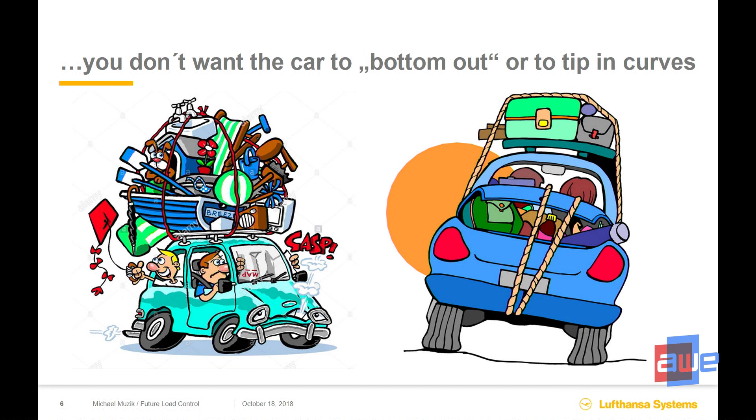Imagine you pack your family car for a family vacation with two children. You will look at where you sit the passengers and family members and where you put the luggage, because two things might happen: if you put too much weight into the car, it might bottom out when you hit bumps on the road and get damaged. Second, if you put too much weight on top, the car might tip when going around curves.

So by carefully considering where to put the passengers and the luggage in your family car for safety reasons, the same care has to be taken when loading the aircraft. Only different gravitational rules apply - the so-called aerodynamics - because the aircraft is not only taxiing, it's also taking off, it has a flight phase, and it's landing. So this has to be considered.

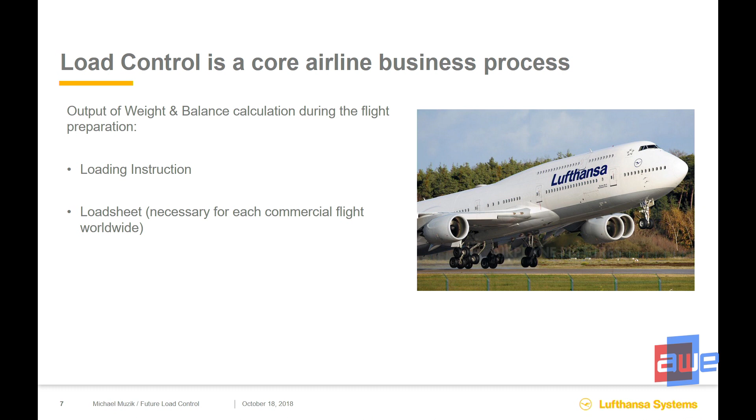Coming now to the weight and balance of the airline business - the weight and balance process is one core airline business process in the operational process, alongside crew management, operations control, fuel calculation. There are two outputs. First is the loading instruction, sent to the loaders and the ramp agent on the apron. This loading instruction is either digital or on paper, telling the people how to load the aircraft - exactly this ULD, this unit, this container has to be put there, and this container has to be put there.

The second thing, which represents the final step of the weight and balance process, is the load sheet. The load sheet is sent automatically, usually to the cockpit, to the pilot, and there you can see the maximum weights for takeoff, landing, and taxiing. He gets the passenger data, information about dangerous goods, and the trim data - the balance data.

So basically, when we're talking about weight and balance in the airline business, the weight part means the load controller has to ensure that the maximum permitted takeoff weight is maintained, and therefore some calculations have to be done by a system.

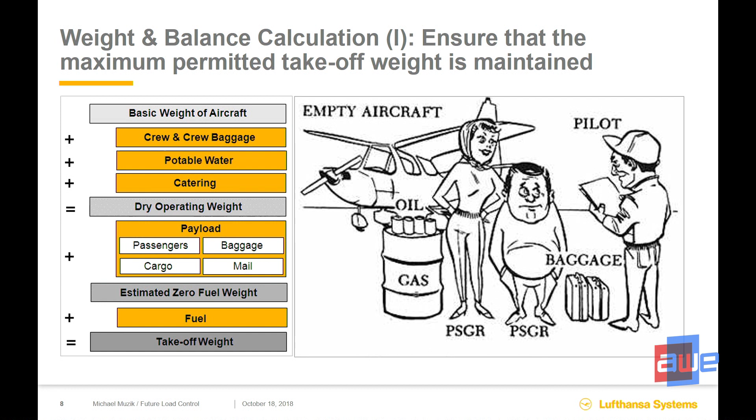You have the basic aircraft weight. You have to add the weight of the crew and the baggage, the potable water, the catering. Then you have the dry operating weight, and then the payload - and there it gets interesting because you also have to load the cargo, the passengers, the baggage, the mail, special load, whatever. This is the estimated zero fuel weight, and this is done in the pre-phase before the fuel is calculated. This is very important because the estimated zero fuel weight is sent to flight dispatch, who calculates the operational flight plan - saying how the aircraft will fly, for instance from Frankfurt to JFK, which route, and how much fuel has to be taken.

The more accurate you are, the better the fuel calculation. This is really money for the airlines, because if you have a wrong calculation, you might carry a lot of excess fuel, and that also costs money.

The balance part - the load controller has to ensure that the center of gravity is within the permissible range, which means you have to distribute the load, like the baggage and the cargo, in a way that the aircraft is also safe when being in the air.

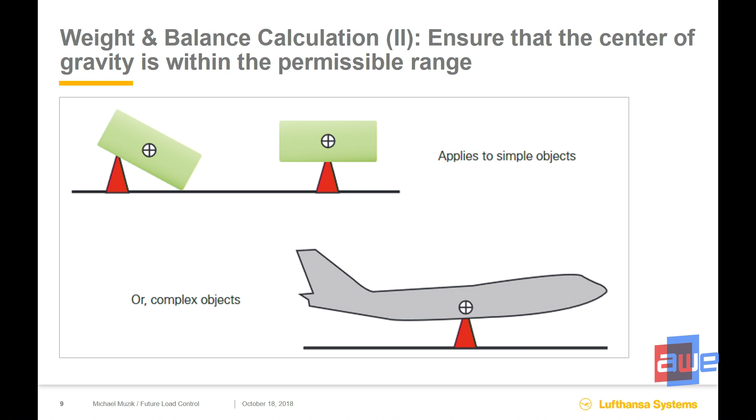Okay, I hope this was a little intro into weight and balance. So let's go into the day-to-day business of load control.

How does today's load controller's world look like? At big airlines like Lufthansa, they have big load control center departments where one load controller sits in Cape Town, or in Istanbul, or in Brno in the Czech Republic, and they centrally do all load sheets and loading instructions for all the Lufthansa flights around the world.

So basically, this is like Anna. She's now sitting in Istanbul, and she's doing load control for Lufthansa at the moment with an application.

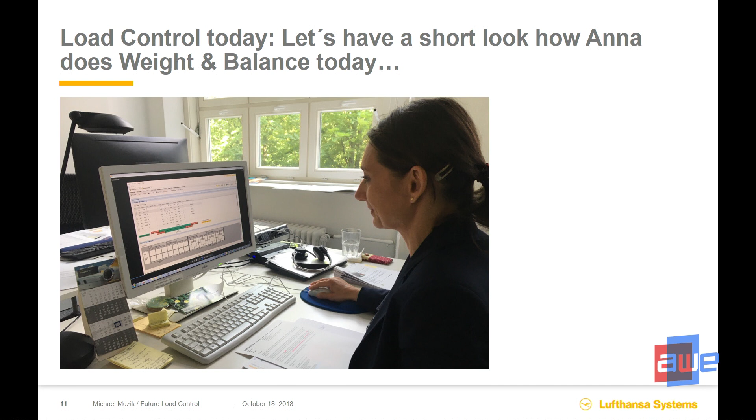And this is how the application currently looks like, just to give you an idea about the 2D visualization. On the bottom, this is the most important part. We are doing the loading of a 777.

This is a freighter. There you can see the compartment, the belly. We have a main deck and a lower deck. And above this, you see the compartments, and above this, the green thing.

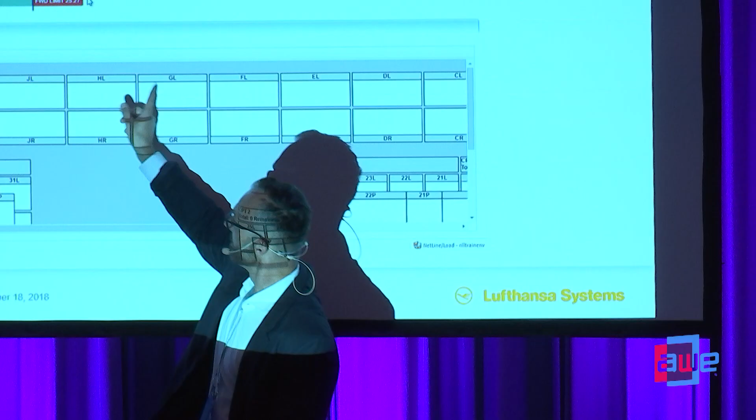This is the trim bar, where she always sees when she puts some kind of container into the belly here. This is representing pallets and containers. When she puts something loaded versus nothing loaded, she can always see if she puts freight somewhere, how the trim is going to change.

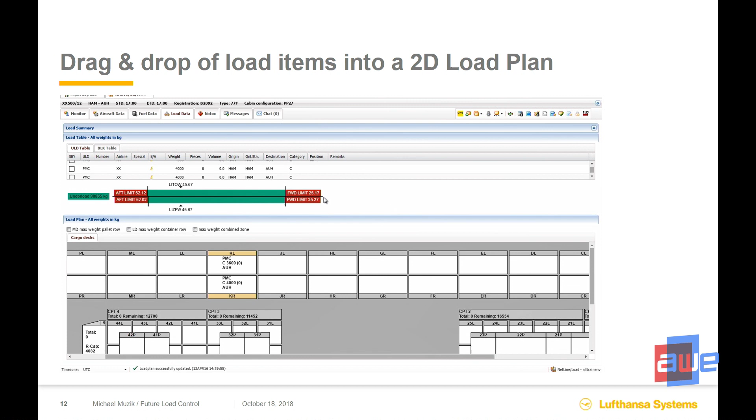And if it's green, she's still within the permissible range. So this is basically how today's load controllers work, the 2D visualization of the load plan.

What you cannot see, and what is a problem especially among cargo airlines, is that you can't see indents or overhangs. It's always just represented as a pallet or container surrounding. So this usually causes a problem when doing load control today.

So we were very often asked, what's your vision about load control? Where do you see it? We were sitting and considering how load control of the future could look like.

And of course, we were looking among other branches like plastic surgery and architecture, or environmental design, or the automotive industry, where VR is already a main mover and very imminent. So that's where we got our idea.

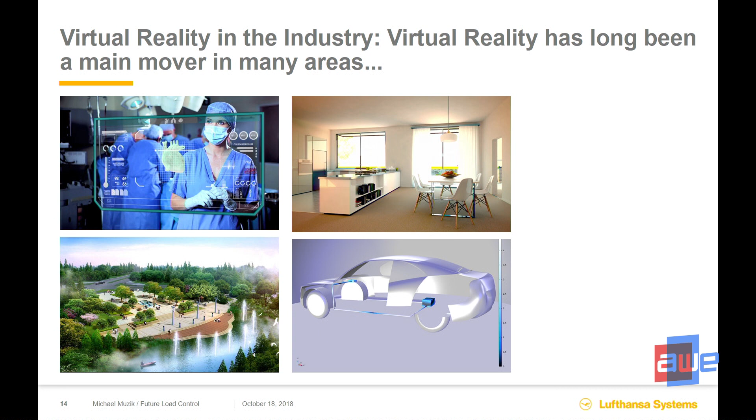And then we also looked at how VR is currently being used in the airline industry, basically or technically speaking in the design phase, like designing aircrafts or designing aircraft liveries or designing cabin interiors. The airlines moved very fast forward with the virtual design technology.

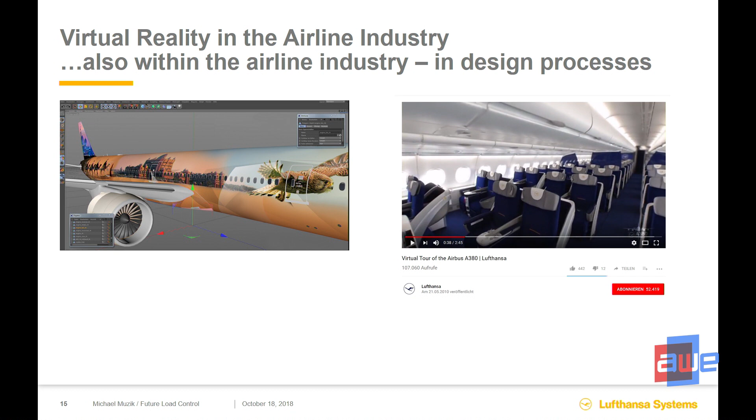But when it comes to operations, there we still have a bit of a gap. Most likely you will know that pilots generally simulate flight situations in the flight simulator.

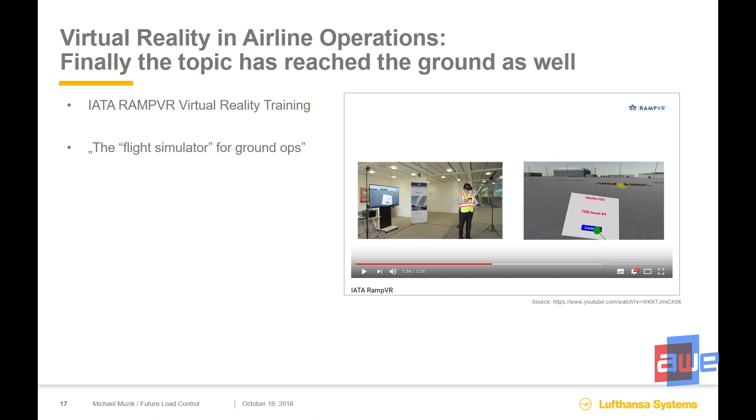And so this topic is now also coming to the ground. For instance, IATA has developed an application that basically also provides certain situations for the ramp agent who is, for instance, responsible to taxi the aircraft to the gate position. So it's basically now coming into the airline business, but very, very slowly.

The airline business is very reluctant to this stuff. So in airline operations, this is the only thing that I know of. And we just thought, okay, why not also use it now in load control?

And so how does future load control look like? And therefore, of course, we had to do some things. We had to virtualize the aircraft. We got the data from Lufthansa.

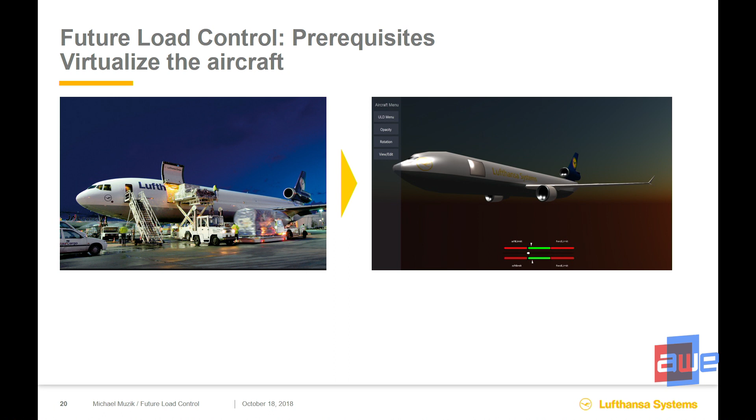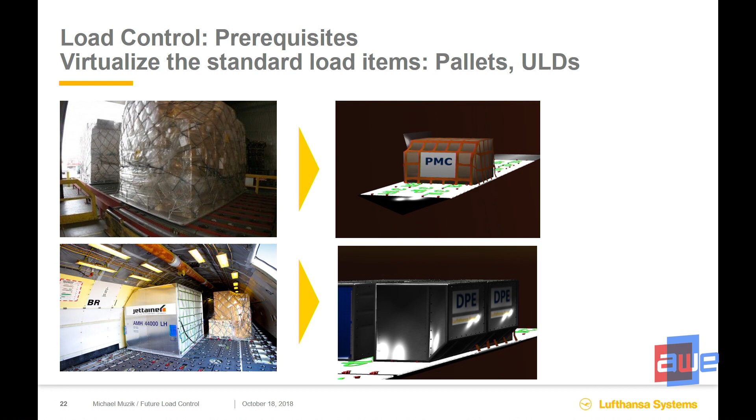For instance, for this MD-11, it's a cargo freighter, we created a prototype. We had to virtualize the interior, the holds, and also therefore we needed the aircraft data. And we had to virtualize the standard load items like pallets or ULDs, unit load devices, or also containers. The ULDs are the containers where your baggage will be loaded.

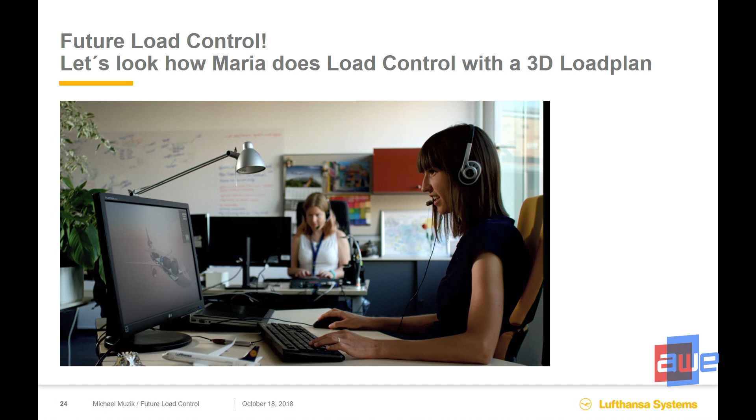And this is now how the result looks like. So let's get back, we switch to Maria because she is now already working with the 3D load plan. And I would like to show you how this might look like. So, and therefore I would kindly...

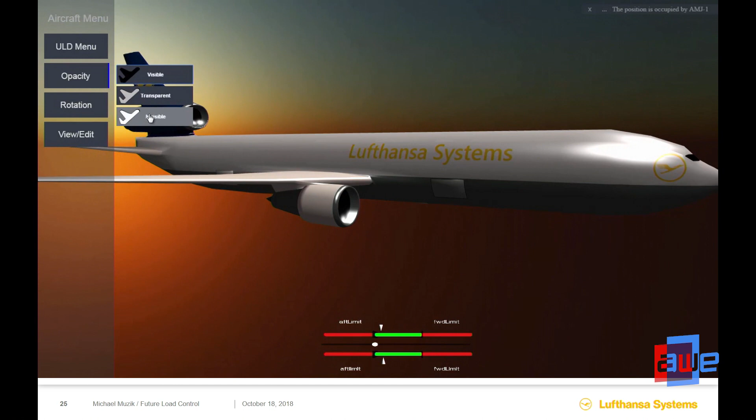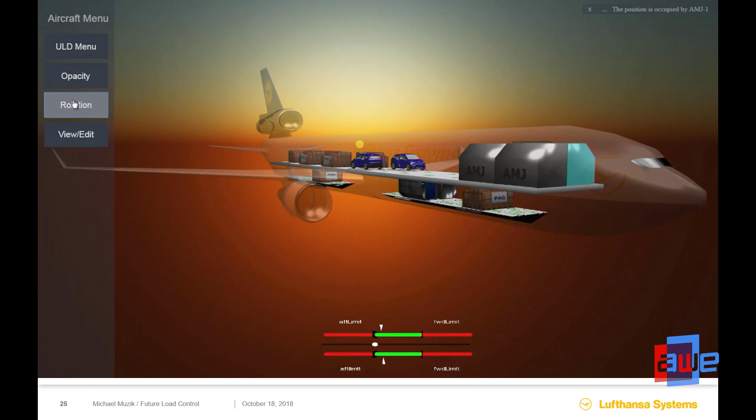So why not use it in load control, where loading instructions are still in 2D? The 3D load plan represents the 2D version in a highly user-friendly screen with intuitive navigation. It provides load controllers with a realistic view of what the load plan will look like upon completion.

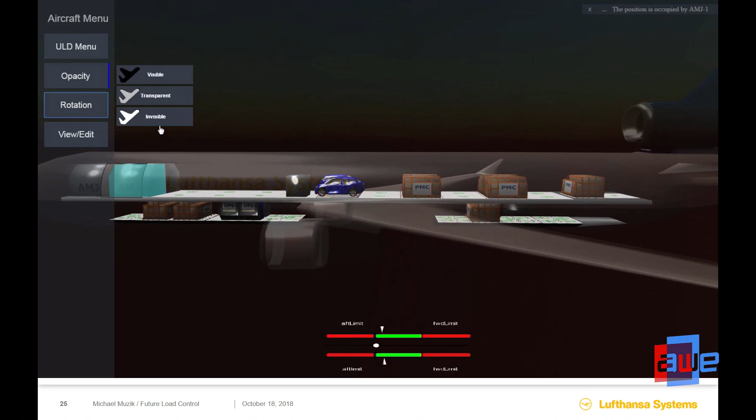The user can easily view the 3D load plan from every angle by simply turning or rotating it the way he likes. The load controller can also zoom into particular load items, especially if he needs a closer look at interior spaces, for instance to identify overhangs, indents, or inoperative locks.

When creating or optimizing the load plan, the load controller can easily add load items, and of course can also remove them with one click. Load items can also be distributed by simply drag and drop.

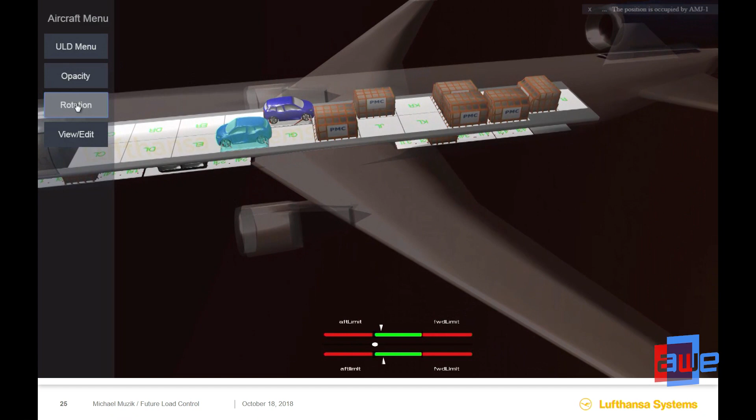The load controller immediately sees the result on the actual trim bar. All load data is updated automatically within the application. This includes all relevant checks for aircraft limitations and dangerous goods restrictions, as well as warnings if these are violated.

Okay, so this was now like a little impression how the 3D load plan looks like. I think you saw the difference between the 2D visualization.

However, looking at the two other operational products like the ramp solution or the simulator, the load controller faces one situation that is new for airline operations that the other two don't face. It's basically something that comes especially if cargo airlines are affected, that the user has to create part of his virtual reality, meaning that we have special load that needs special treatment also.

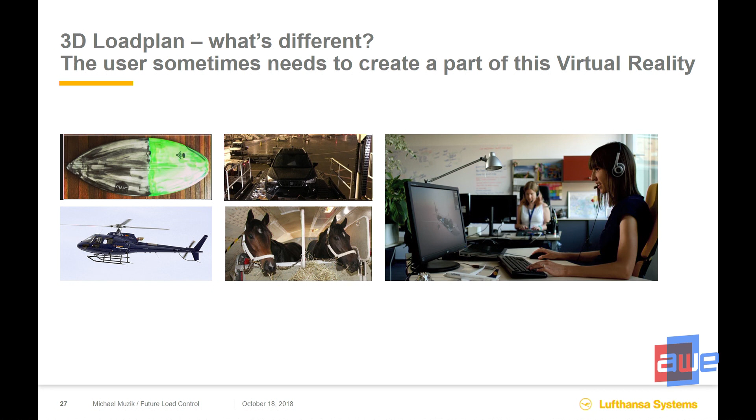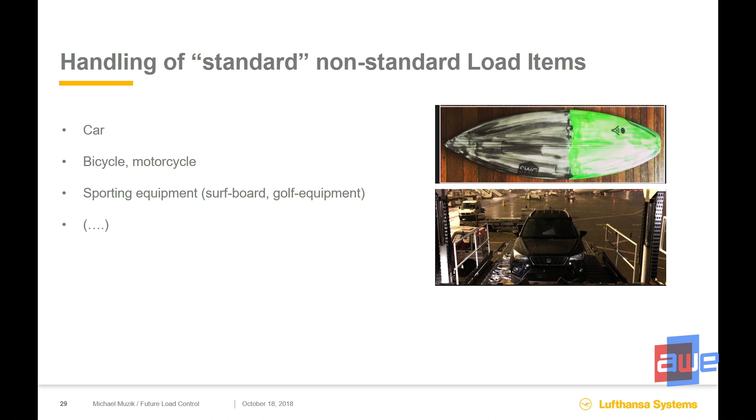So in that case, you can see that we have special items, and we divided them into two groups. The first one are standard, non-standard load items. What am I talking about? It's like cars, bicycles, motorcycles, sporting equipment. We were actually approached by the cargo airlines, and they asked us, okay, so what do we do with the special loads? What are we doing with the stuff that is not a bag or not mail?

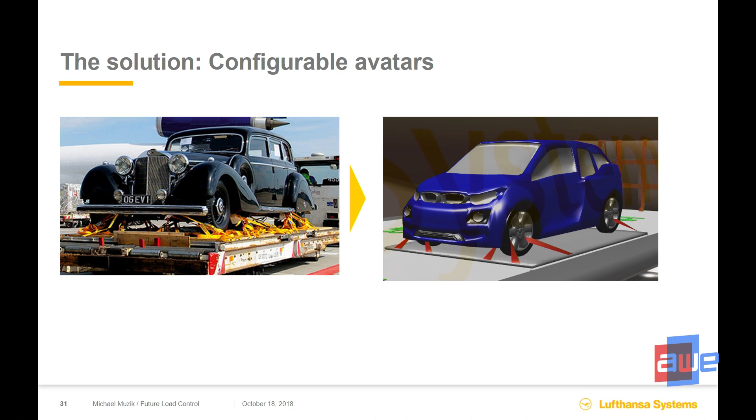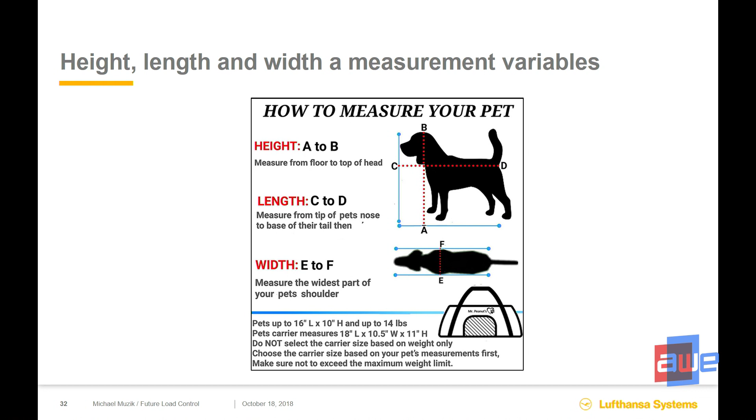So we basically had to think of a solution. And the first solution was that we were watching a movie, and then we said, okay, let's take this idea and create little avatars. So we created, for these non-standard items like motorcycles, cars or surfboards, little avatars, which can be configured by the user, just by inserting the height, the length, and the width, so that he can configure his own load item.

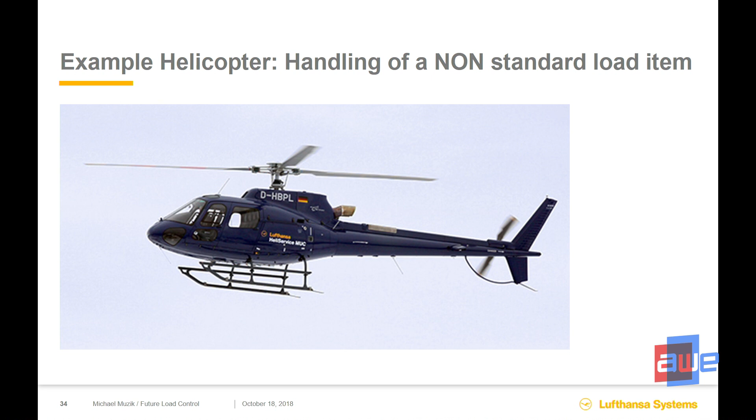The more challenging question was what to do with non-standard load items that are really completely non-standard. So we were asked this also. We had two approaches. First of all, let's take maybe a helicopter, which is very non-standard, and we had two approaches.

The first one is also simple. We were asking the airlines, is it necessary for you to see in the aircraft a helicopter, like an avatar? They said no, but we want to have a sort of representation. So the easy solution was also just to create a cubicle.

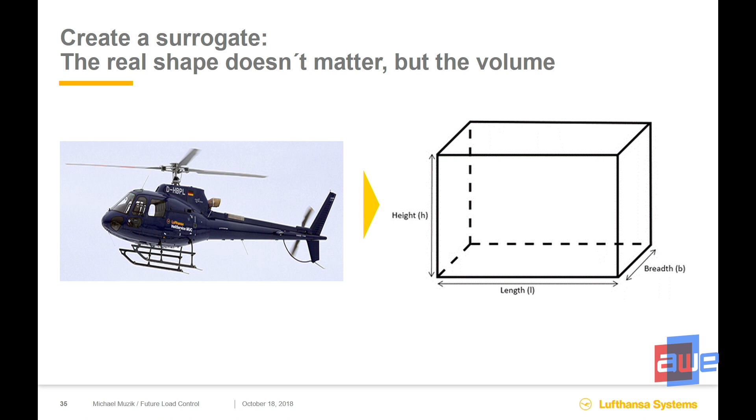Yeah, but a cubicle is nice, but there is a smarter solution that we thought of, because the advantage of a 3D load plan should be that you see also indents and empty rooms and stuff like that. So we basically said this is our approach: instead of one cubicle, you can measure and configure this non-standard load item more specifically and exactly by configuring each of the three cubicles.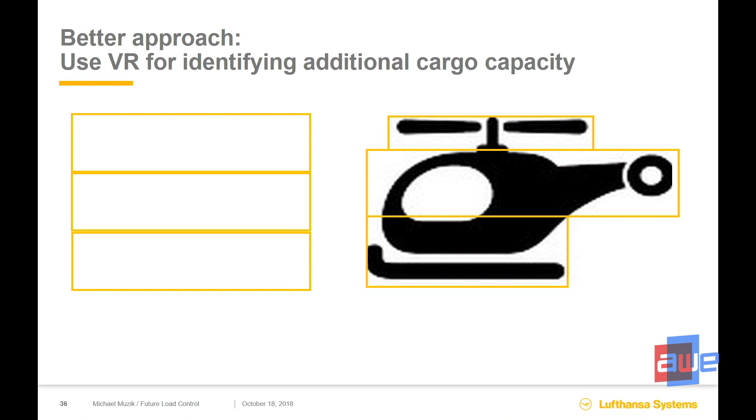And there's also a monetary effect for it, because there you can now identify additional cargo capacity which can be used and sold, and which is money. And this is one of the benefits of 3D visualization in load control.

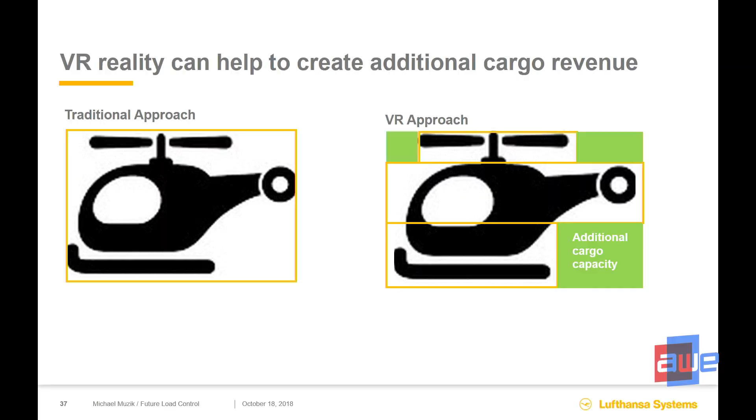So bringing 2D into 3D load control, what's the bottom line? And I would like to...

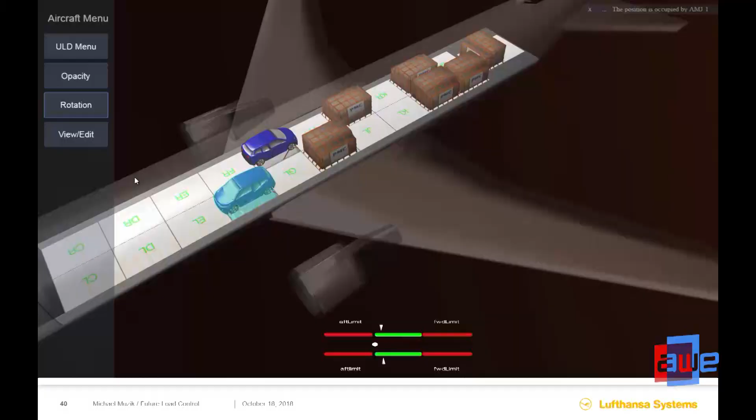So what are the benefits of a 3D load plan? Firstly, it minimizes error. As 3D visualization provides the load controller with a realistic view of the load plan, he can, for instance, see if a non-ULD conforming load fits or not.

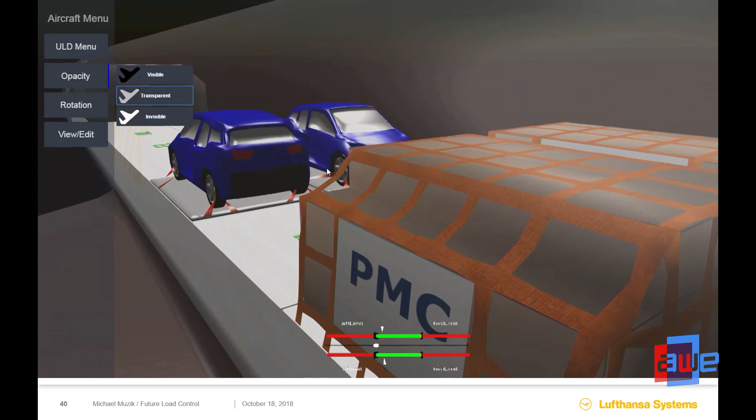Secondly, it supports operational stability. The load controller can identify wrongly positioned load items before the actual loading commences and take necessary corrective action. Flight delays due to incorrect loading will be minimized.

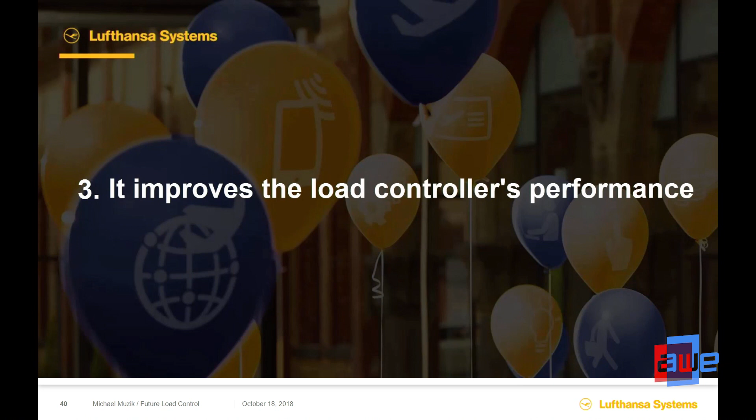Thirdly, it improves the load controller's performance. Today, many load controllers work remotely and do not necessarily have a ramp agent background. With the 3D load plan, the right belly loading, especially for unusual load items, can be much more easily understood for better and faster results.

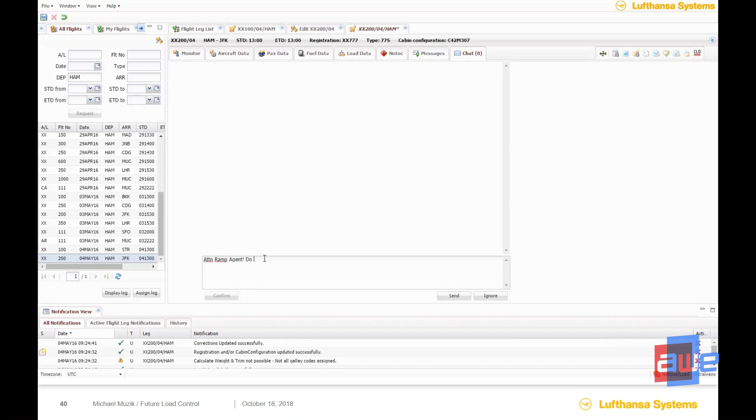Fourthly, it eases training and learning. For load controller trainees, the skill of creating a good load plan will be much more efficiently acquired with this technology. And finally, it improves the communication between load controller and ramp agent. With a 3D load plan, both are literally on the same page about the loading of the aircraft. They can communicate more easily.

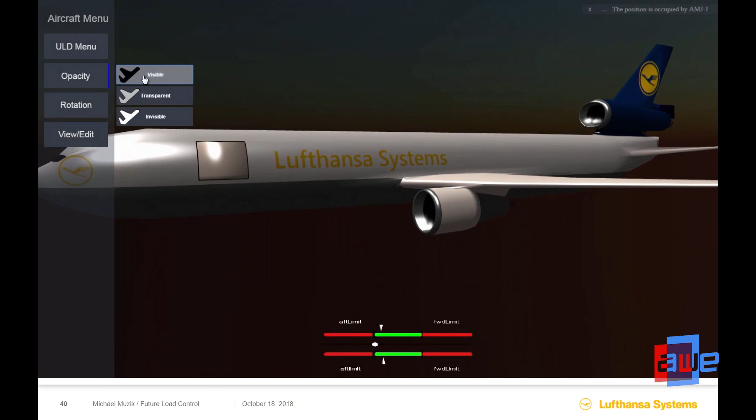So in summary, the utilization of 3D visualization technologies in weight and balance may be one significant feature of the future load control. The 3D load plan is therefore a chance to reinvent load control with new technology, leading to more efficient and accurate work execution and, of course, results.

So I hope you got a little bit of the advantages, and of course one more advantage is that you can see indents and free spaces, so that you can maybe load more cargo and make more revenue out of your cargo. This was the outlook of future load control.

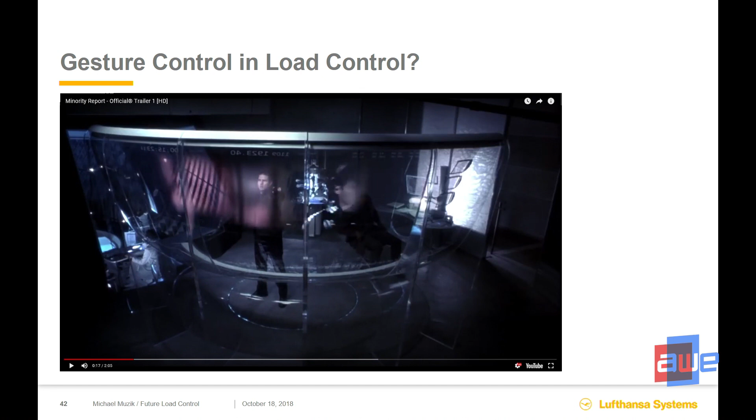We had a little team that went one step further. I want to share this with you too. What could be the next thing? It's basically load control by... we were inspired again by a movie, Minority Report, and this is how it might look like in the future.

Just a little inspiration. Of course we don't have these big screens at the moment, but this could be the future of load control. I would see it as the next step, to do load control with your gestures.

So this was a little dive into the airline industry, into weight and balance. I hope I could show you how the future of load control looks like, and also gave you a bit of an impression. The airline industry is a little more reluctant on this VR and AR topic. My last thought about VR, when I was walking here through the fair, I said it would be nice if VR could help me in my private life at some points, for instance when I'm cleaning up my apartment.

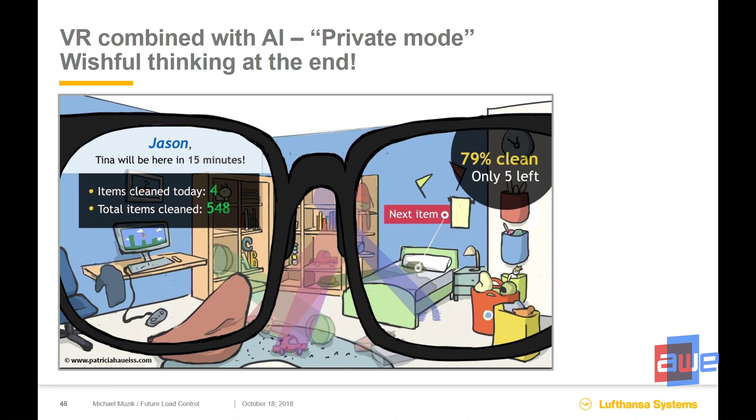No, I think you just got it, I only want to point out you get the microphone next. So, thank you for your presentation.

I have a question. As one of the next steps, do you also think about visualization in AR for your ramp staff, to use this virtual plan of your load plans in AR for the ramp personnel? I'm pretty much sure that AR will be a part of the ramp work.

I've already seen devices where, for instance, the ramp agent can immediately evaluate if the pallet is packaged in the right way or not. I'm not sure if it's going to be for the ramp agent though, because I think the concept will more be that, for instance, the ULDs will identify themselves that they are loaded on a device. So I don't think he will need to see it.

I think the containers and the baggage, this is where the airline industry is going, also with baggage tracking and tracing - they identify themselves, and he will have it on his iPad. But I don't think that for the loading he's going to need virtual or augmented reality glasses. But this is my personal opinion.